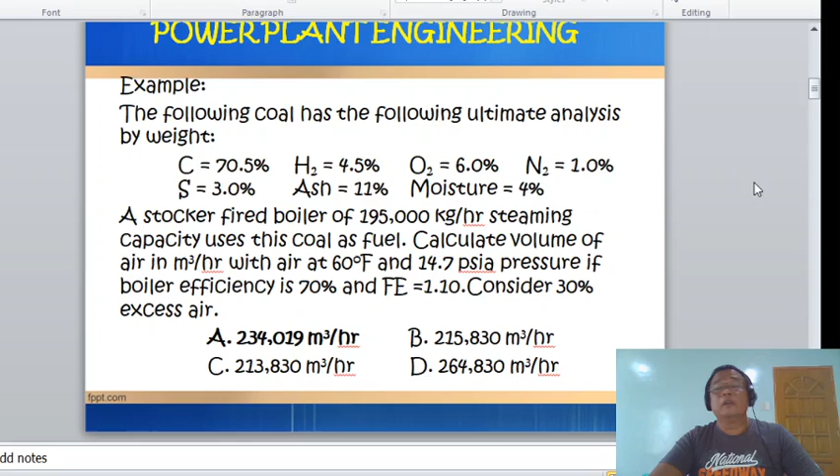Okay, so first we are going to determine the theoretical air fuel ratio of the fuel used. We have the formula 11.5 multiplied by the percentage carbon plus 34.5 multiplied by hydrogen minus oxygen over 8 plus 4.29 of sulfur. Since the amounts of the chemicals involved in this formula are already given, substituting the values, the theoretical air fuel ratio now is 9.53 kilogram of air per kilogram of fuel.

So since we are given with the excess of 30%, the actual air fuel ratio now is 9.53 multiplied by 1.3, or the actual air fuel ratio required for the complete combustion of the fuel is 12.389 kilogram of air per kilogram of fuel or coal.

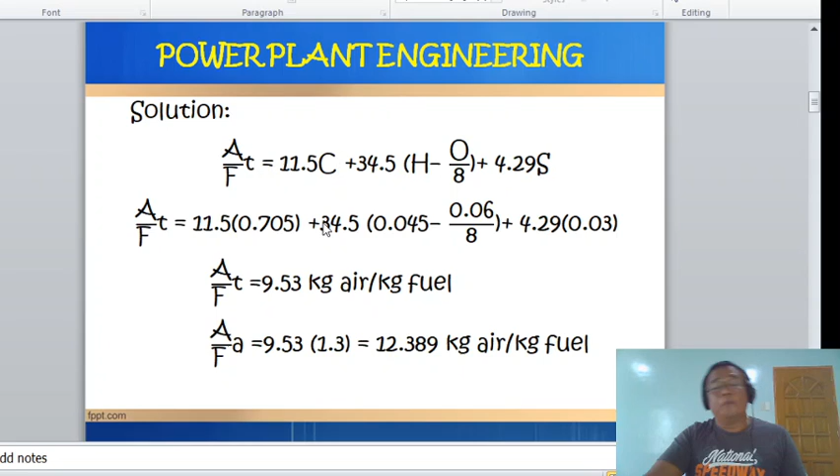Okay. So, since factor of evaporation is also given, we have the formula factor of evaporation is equal to the change in enthalpy divided by the HFG, of course, 2257 or 970 in English. So the change in enthalpy is 2257 multiplied by 1.1, that is equal to 2,482.7 kilojoules per kilogram.

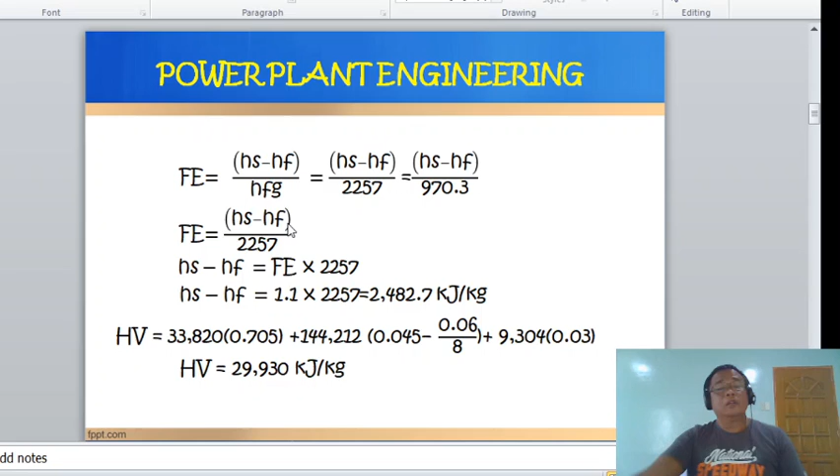And determining the heating value of the fuel, we have also the Dulong's formula. So that is 33,820 multiplied by 0.705, the percentage of carbon, plus 144,212 multiplied by the percentage of hydrogen minus percentage of oxygen over 8, plus 9304 multiplied by the sulfur content. So the heating value now is equivalent to 29,930 kilojoules per kilogram.

Okay, so for the boiler efficiency of 70%, the formula, of course, boiler efficiency is equal to the heat produced in the boiler divided by the heat supplied to the boiler. So determining now the fuel required by the boiler, that is 0.70 multiplied by 195,000 steaming capacity multiplied by the change in enthalpy over MF times the heating value of the coal. So the mass of fuel required now is 23,107.56 kilogram fuel per hour.

So for the mass of air required, since we have already the air fuel ratio, mass of air now is equal to 23,107.56 multiplied by 12.389. So that is equivalent to 286,279.57 kilogram of air per hour.

So using now the ideal gas equation, PV is equal to MRT. And determining the volume now, the volume required is equal to 234,019 cubic meter per hour. Okay? So that is now the answer. So the option is, of course, letter A.

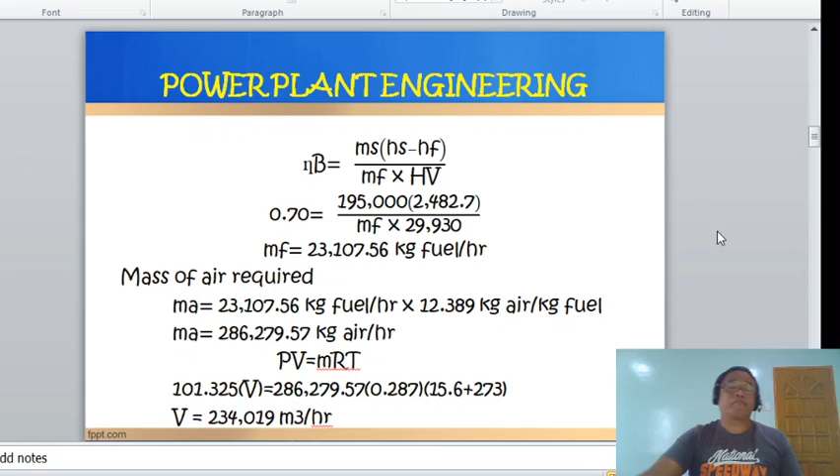Okay? So, class, we have also another problem here. Let us also take now this example. So 23.5 kilogram of steam per second at 5 megapascal and 400 degrees is produced by a steam generator. The feedwater enters the economizer at 145 degrees and leaves at 205.

So the steam leaves the boiler drum with a quality of 98%. The unit consumes 3 kg of coal per second as received, having a heating value of 25,102 kilojoules per kilogram. What would be the overall efficiency of the unit in percent?

So let us now consider the properties of the steam. At 5 megapascal and 400 degrees Celsius, the enthalpy of the steam is 3,195.7 kilojoules as obtained from the table. H sub F, or the enthalpy of liquid at 5 megapascal, is 1154.23 kilojoules per kilogram, and H sub FG, or the saturated vapor, is 1640.1 kilojoules per kilogram.

So at 205, H sub F is 875, and at 145, H sub F is 610.63. Okay? So let us now solve this example. Take note that the required is, of course, the overall efficiency of the unit in percent.

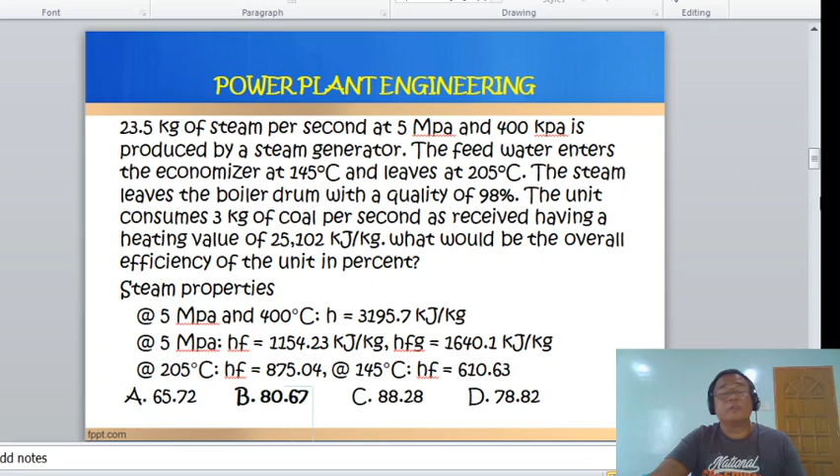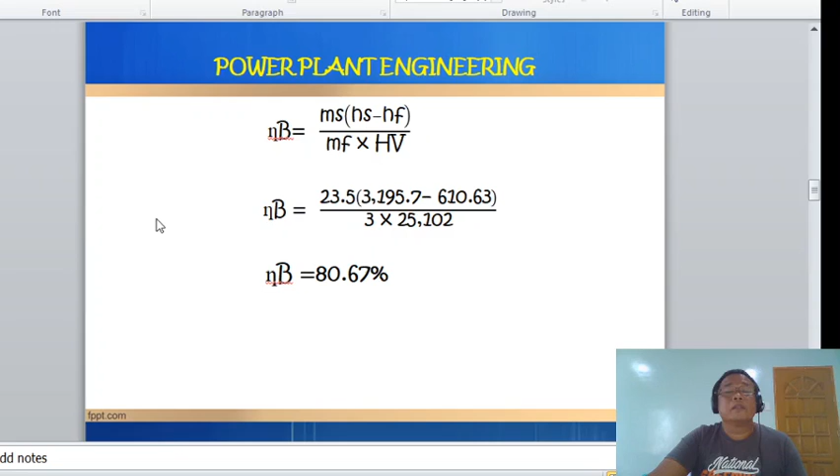So boiler efficiency now is equal to mass of steam multiplied with change in enthalpy at the boiler side over the heat supplied to the boiler. So substituting values now, the boiler efficiency is equal to 80.67%. Okay, so very easy, class.

Okay, another example. A waste heat recovery boiler produces 4.8 megapascal dry saturated steam from 104 degree Celsius feed water. The boiler receives energy from 7 kilogram per second of 954 degrees Celsius dry air. After passing through the waste heat boiler, the temperature of the air has been reduced to 343 degrees Celsius. How much steam is produced in kilogram per second? Note, at 4.8 megapascal dry saturated, enthalpy is 2796 kilojoules per kilogram. So we have here options A, B, C, and D.

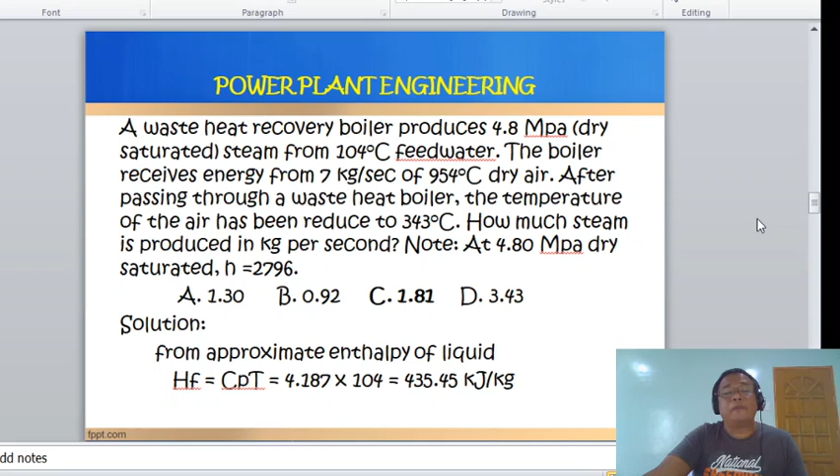From approximate enthalpy of liquid, h sub f is equal to the specific heat of liquid multiplied by the temperature. So the enthalpy now is 435.45 kilojoules per kilogram. Heat loss is equal to heat gain. The heat loss is equal to the mass of gas, Cp of the gas, and the change in temperature of the gas, which is equal to the mass of steam multiplied by the change in enthalpy of the steam. So the mass of steam now required is 1.81 kilogram per second.

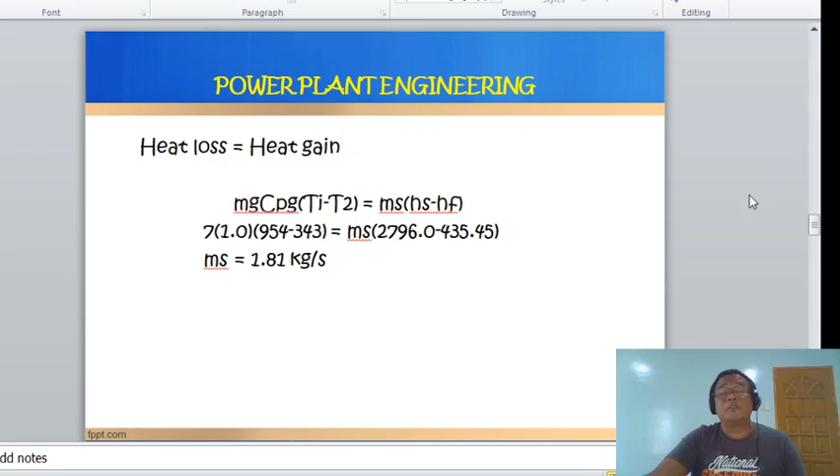If you understand the principles involved in this topic, it is very easy for you to solve the problem. Okay, so we have also another example here.

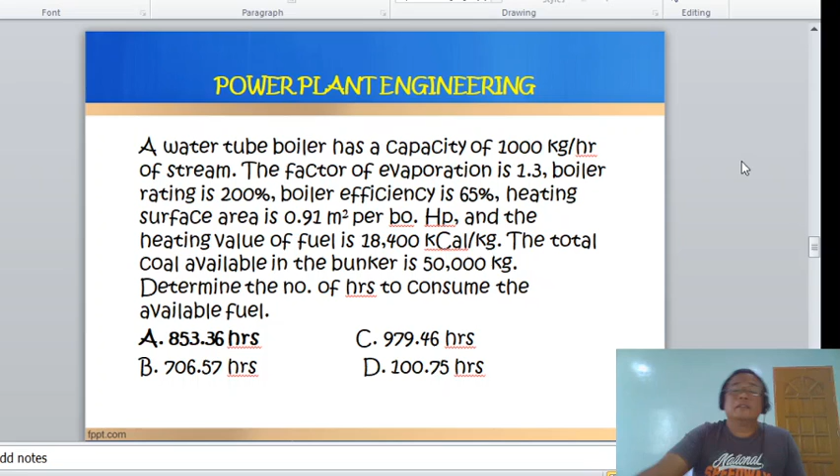A water tube boiler, take note, water tube boiler, has a capacity of 1,000 kilogram per hour of steam. The factor of evaporation is 1.3. Boiler rating is 200%. Boiler efficiency is 65%. Heating surface area is 0.91 square meter per boiler horsepower, rated. The heating value of the fuel is 18,400 kilocalories per kilogram. The total coal available in the bunker is 50,000 kilograms. Determine the number of hours to consume the available fuel. This is very easy. We have also options here, A, B, C, and D.

Solution. Knowing the factor of evaporation, change in enthalpy now is equal to 1.3 multiplied by 2257, so that is 2934.1. Then using the formula for the boiler efficiency, we can easily determine the mass of fuel required per hour. So mass of fuel now is equal to 58.592 kilogram per hour.

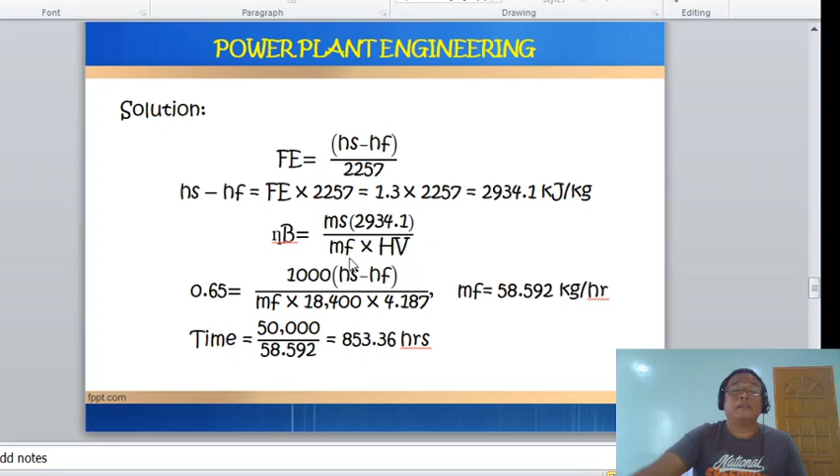So the time to consume the coal inside the bunker is the capacity of the bunker, 50,000, divided by the amount of coal required per hour. So the time required now to consume all the coal inside the bunker is 853.36 hours.

And another example, so you have very sufficient examples here, class. I think it is very impossible for you not to learn something about this topic.

Two boilers are operating steadily on 91,000 kilogram of coal contained in a bunker. One boiler is producing 1591 kilogram of steam per hour at 1.2 factor of evaporation and an efficiency of 65%. Another boiler is producing 1364 kilogram of steam per hour at 1.15 factor of evaporation and an efficiency of 60%. How many hours will the coal in the bunker run the boilers if the heating value of the coal is 7,590 kilocalories per kilogram? Take note, class, that there are 2 boilers consuming the coal inside the bunker, the first boiler and the second boiler. The options are A, B, C, and D.

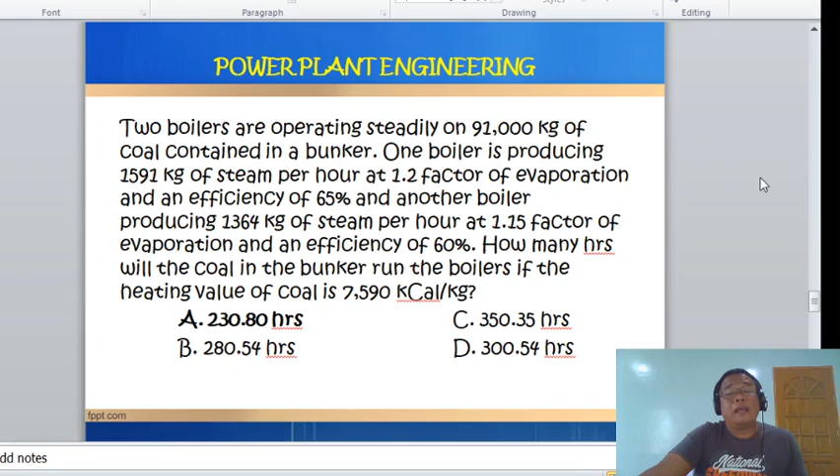So let us now solve for the time required. Mass of fuel for boiler 1: since there are sufficient givens, substituting values into the boiler efficiency formula, the mass of fuel for boiler 1 is 208.605 kilogram per hour. And the mass of fuel for boiler 2, the same formula with different given values, is 185.673 kilogram per hour.

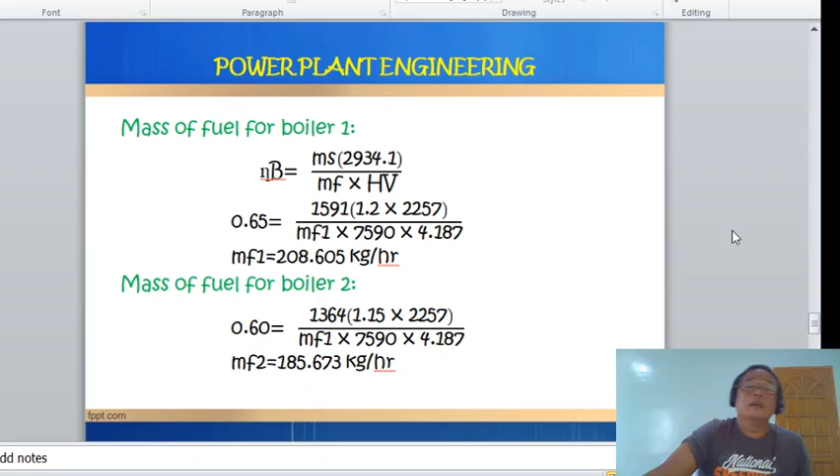Then computing the total fuel required per hour, that is equal to 394.278 kilogram per hour. Solving for the time to consume the fuel, that is the capacity, 91,000, divided by 394.278 kilogram per hour. So the equivalent time to consume the coal inside the bunker is 230.8 hours. This is very similar, class, to the previous example.